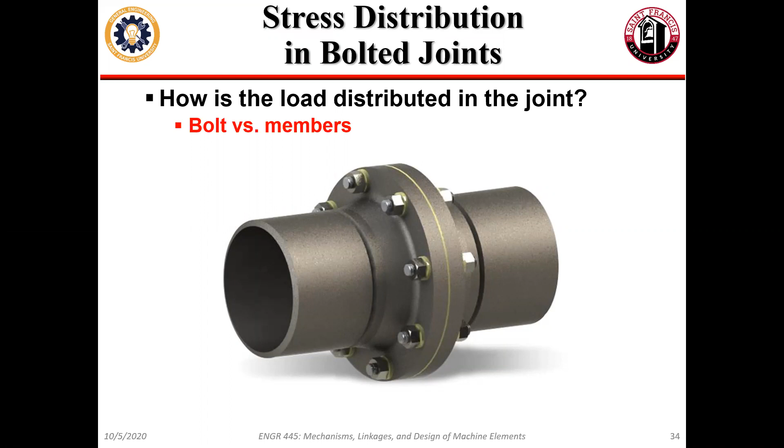So really the question is now, how is the load that we put on a bolt, or that is applied externally, distributed in the joint? We've talked about how the stress is distributed, we've computed how the stiffness is distributed, now we have to talk about how the load is distributed.

Okay, so now that we've come up with a spring rate, kind of a force per unit length of extension or contraction for both the bolt and the members, it's kind of intuitive to say that deformation is directly related to load and stiffness.

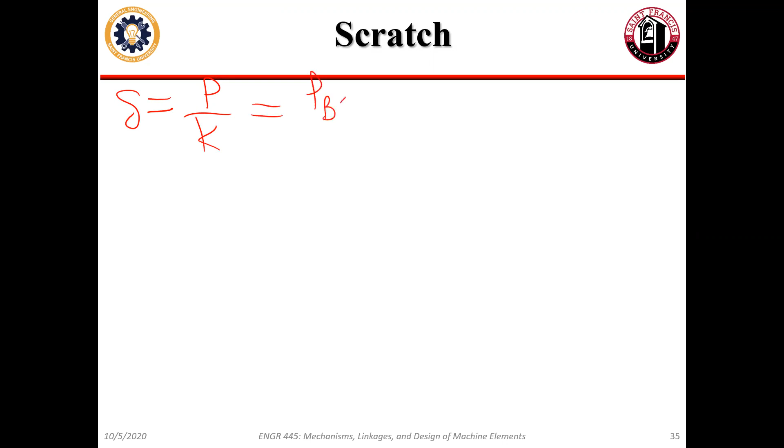That's pretty straightforward. So I can say something like the load that's being exerted on the bolt, divided by the spring constant of the bolt, is equal to however far the bolt's being stretched. And that's the same amount that the members stretch. That kind of makes sense—it's one joint, it's moving as one.

So that also means that whatever load is on the members is related to the spring constant of the members and that same deformation. We're not going to assume they're the same, because they probably aren't. If I have a whole bunch of rubber held together by a steel bolt and the joint's in tension, I'm going to guess that most of the load is going to be taken up by the bolt because it's so stiff.

Intuitively, if I have a platform supported by a whole bunch of really stiff springs and a couple of soft ones, it's the stiff ones that keep it from compressing when I step onto it. It's intuitive that load should distribute itself proportionally to the stiffness of the members holding that load. But we need to, one, prove that, and two, apply it in some way that gives us a numeric result.

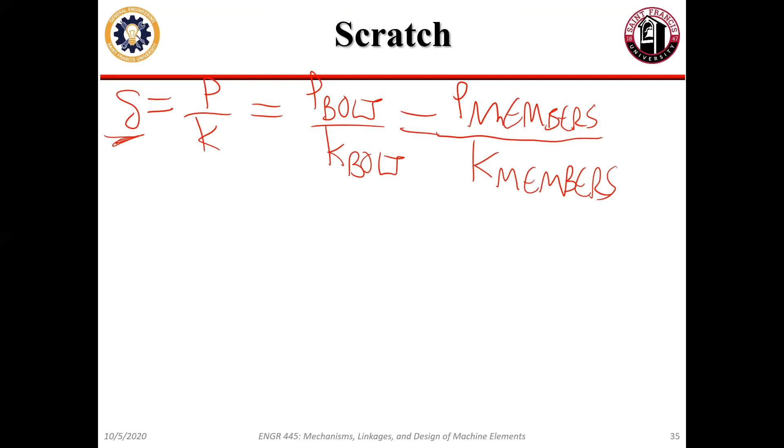So game on. P is just the load, P is a force. P bolt is the load of the bolt, and P members, or that thing that looks like an M, is the force that's acting on the gripped members.

So given that both the bolt and members are experiencing the same deformation, we can solve this out. Say the load on the bolt—I'm just arbitrarily picking that—and that will confirm our intuition that the load on the members or on the bolt is just distributed in proportion to their stiffness.

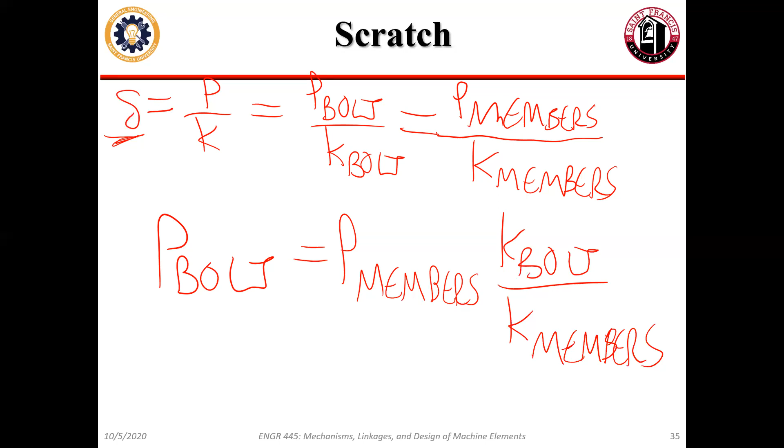If they're both of the same stiffness, great, then they both have the same load. We get that intuitively, and the math is reflecting that, which is great. If one's stiffer than the other—say the bolt's significantly stiffer than you'd expect—the math backs up that it's going to hold more of the load.

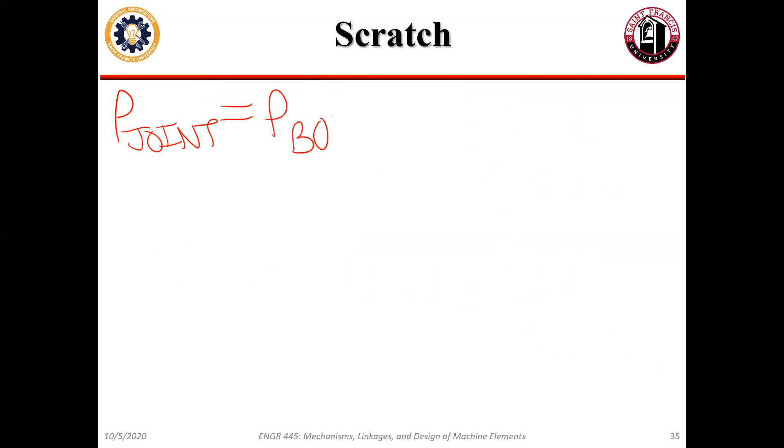So let's play around with this a bit more. We also know from statics that the total force acting on the joint, call that P joint, has to be the summation of the load on the bolt and the load on the members. So that much is obvious, right? If I do a free body diagram, these are all separate members.

Correct—the things that are being clamped. So when you do a free body diagram here, the bolt and the two or more things being clamped by the bolt are separate objects. So when we talk about the load on the bolt and the load on the members, we're not necessarily talking about internal forces. These are each distinct bodies with forces acting on one another.

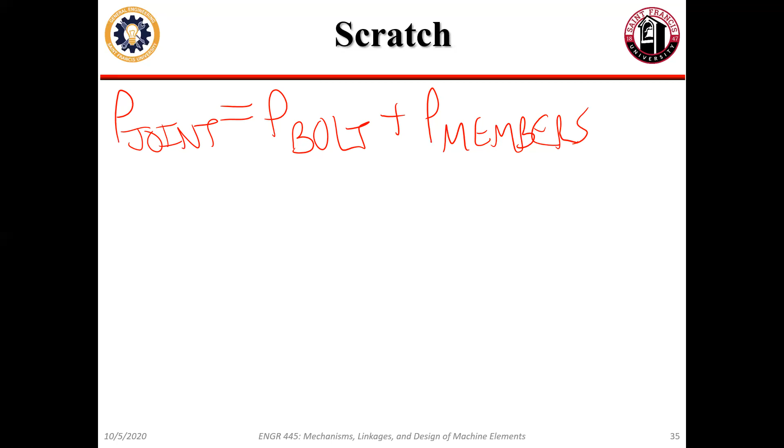So we can do a summation of forces like this and say that the total load on the joint is some summation of all the forces in the joint, which includes both bolt and members together. Using the relationship we just came up with, we can simplify this a bit and put it all in terms of just the bolt load.

I'm going to start shortening stiffness of the members to M and bolt to B, just a heads up. And if we factor out the bolt, that's P bolt times 1 plus K member over K bolt.

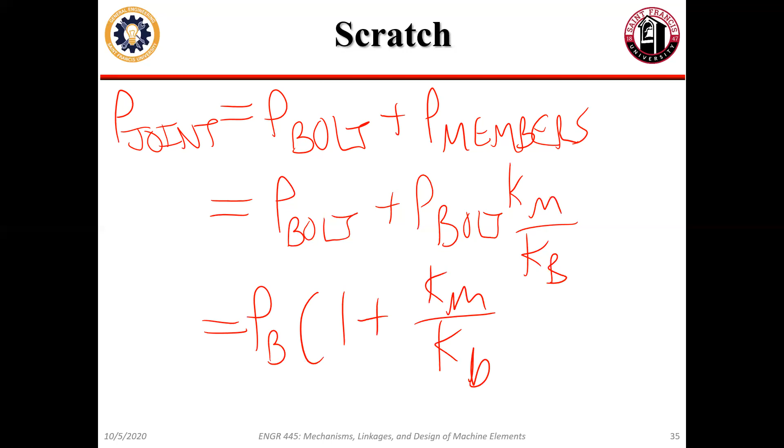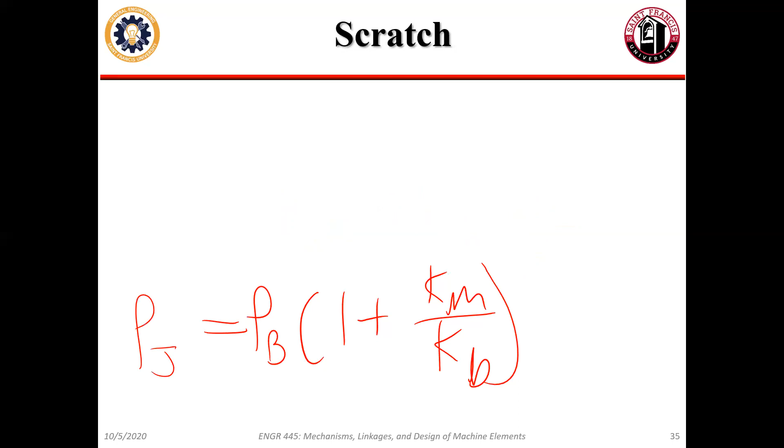Or if you want to flip it around, the load in the bolt... second as it decides which way is up again. Probably. There we go.

So we can flip this around and say that the load in the bolt is just proportional to the load in the joint by the proportion of stiffness, which will be the ratio of stiffnesses between the bolt and the member. So that makes some amount of sense, right? Cool. All right, so this kind of tells us how load is going to be distributed.

What I find really cool about this is that this same intuition holds true across so many different applications. This same idea is how stress distributes in a fiber reinforced composite. That's why we add the glass or the carbon fiber or whatever in there. It's much stiffer than the glue, than the matrix material, so it ends up eating up most of the load. It also makes analysis a pain in the butt, but this same idea holds true. It's super cool, in case you end up doing more stuff with this.

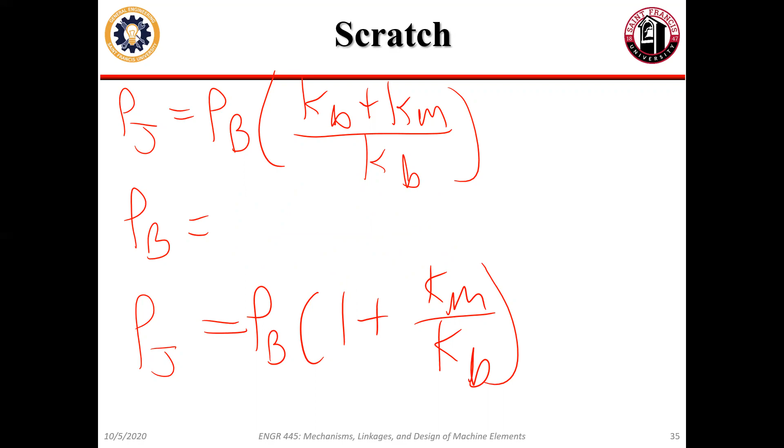So I need to erase it manually by keeping them. Get rid of all that. There we go, all right. So once we got that, I wonder if I can find how to erase it off. The answer is yes, but it's going to take time and it'll be annoying. Cool, all right, so once we got that,

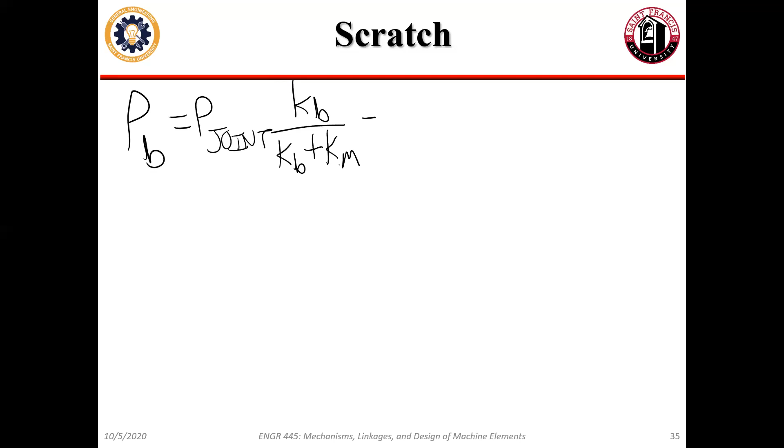That's great, but we've said before that there's one more step to this. The joint will be loaded and we'll distribute support into that, but we're also going to include here preload. So we've talked about this before. This is just a force that I apply to the joint that is over and above whatever load is being placed in the joint by, for example, these are the bolts on the base of a wind turbine, so it's going to be loaded by the fact that there's wind blowing on top of the turbine, the whole tower is trying to fall over and stuff.

In addition to that kind of design load, I'm going to add a preload. So the purpose of adding preload is essentially to make sure that the joint does what I want it to. The joint is only doing this, the load is only distributing itself, because the members in the grip are clamped. If they are not clamped at any point in time, this whole magical thing goes away. Load stops being shared between the bolt and the members, and everything's held by the bolt.

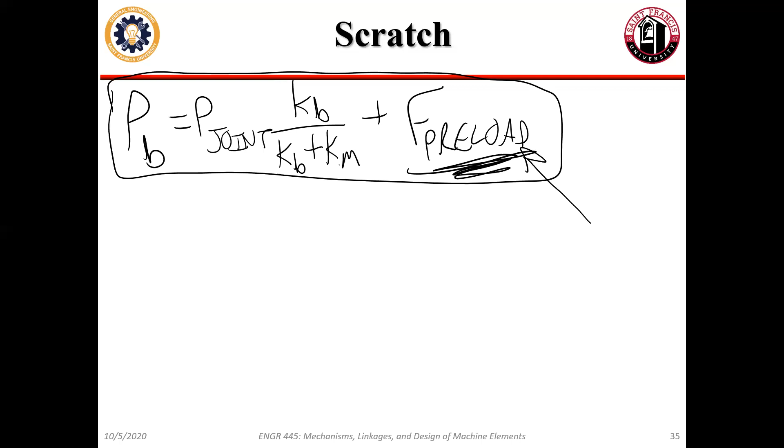So let's talk about that. So if this is our setup, and say that we can come up with an appropriate preload based on a torque wrench or a force indicator, so on and so forth - say that we know what the preload is - that means that the stress in the bolt is pretty straightforward to come up with, right? We grab that, this area being the tensile stress area for the bolt that we talked about before.

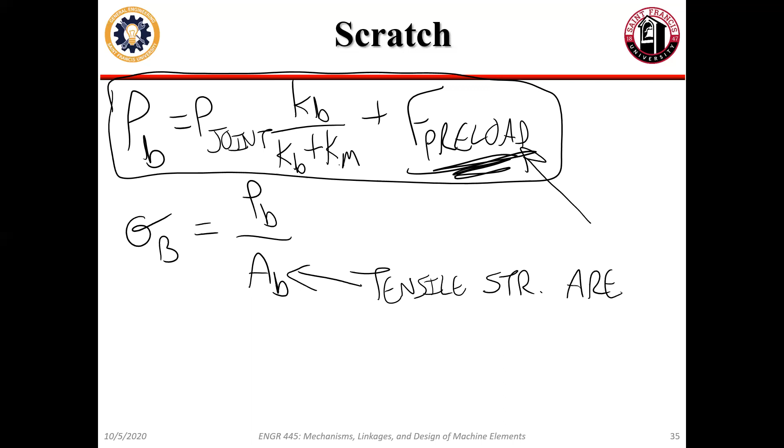That's pretty straightforward. That means we can come up with a factor of safety with respect to the proof strength. Something like that. That's pretty straightforward.

But as said, this factor of safety, that's not really what we're necessarily concerned about. We anticipate that's going to be close to 1 because we want a large preload, because what we're really concerned about is the joint separating. So what we really need to figure out is some factor of safety with respect to joint separation.

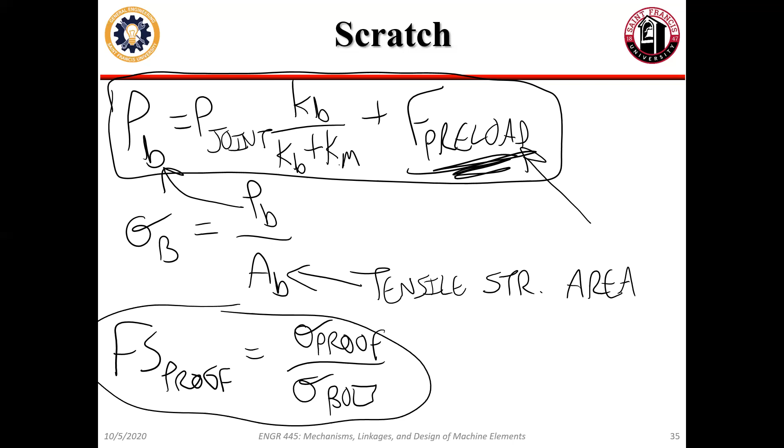So we go back and we expressed... can I erase this, by the way? Cool. So we expressed a statement for the force on the bolt, right?

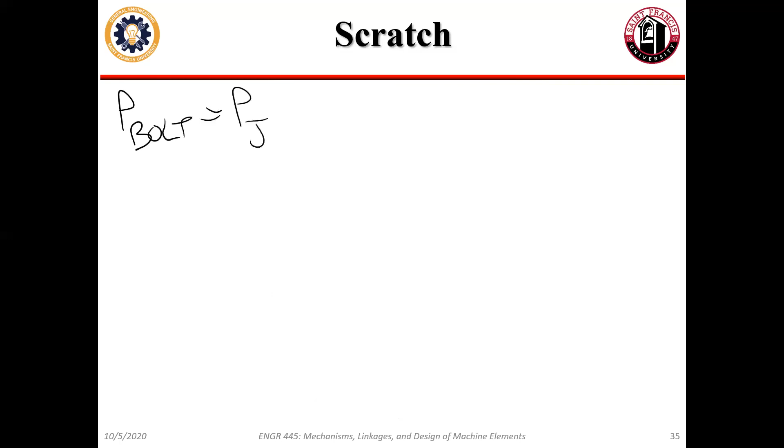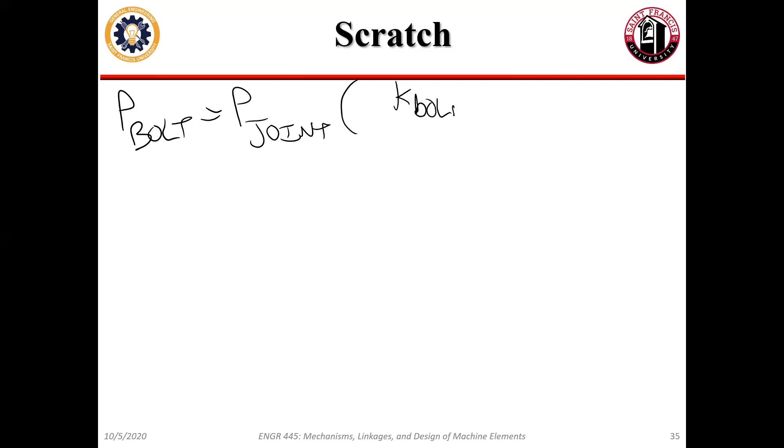We said the force on the bolt is the joint's load times the ratio of stiffnesses. Because the joint load is the summation of the bolt load plus the member load, that means we can just substitute this in and come up with the load in the members being something like this.

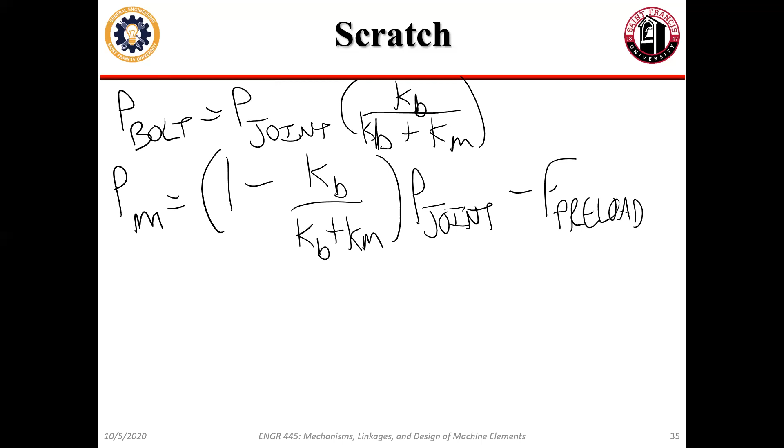When we're saying we're loading it, what direction is that load? Tension. Yeah. Good question. So for the members to separate...

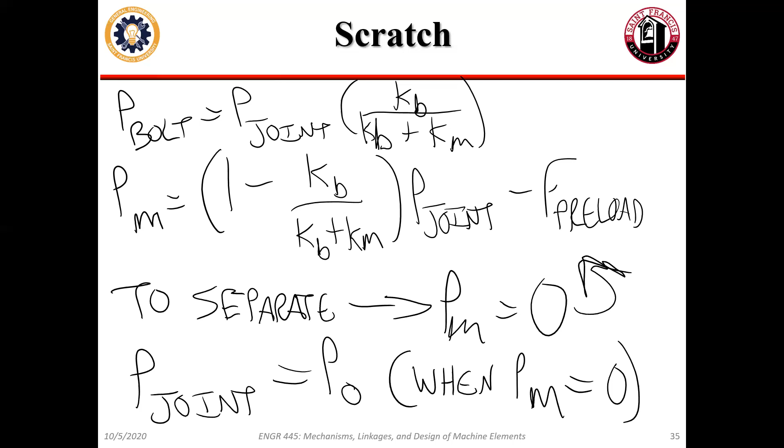The load in the members would be equal to 0. So if we take this expression up here and solve for P joint, we're going to call it P naught, for this condition when the load in the members is 0. If we go ahead and solve for that, we could use that to come up with an expression for a factor of safety with respect to joint separation. So we'll call that something like...

P naught over the applied load. Or if you want to use the notation we have been using, P naught over P joint.

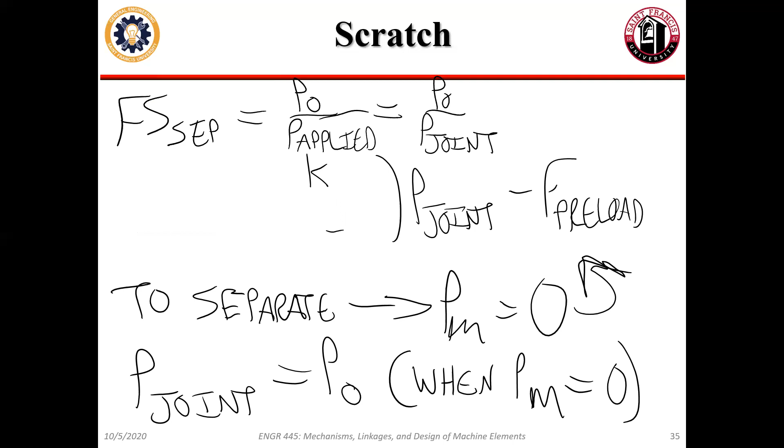So if we work all that out, it is P joint when the load in the members is 0. So if you take the equation I just erased, set it equal to 0, solve for P joint, that is P naught. Cool beans? Sweet. All right. So if you solve that out, you get something like this.

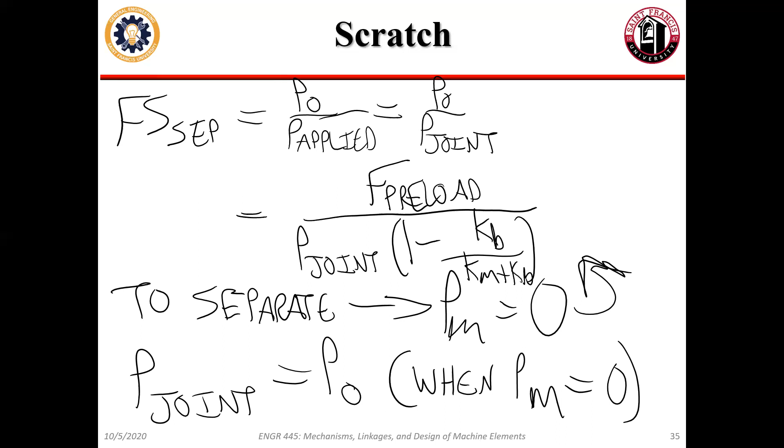Some of this extraneous stuff, which directly has... I'll make this a little bit more clear here too. So the factor of safety in separation is directly proportional to the amount of preload that you throw on this.

So sure, you don't want to yield the bolt because you're putting preload on. Actually, depending on your application, you might want to. Some people actually load a bolt plastically with their preload because it keeps the joint clamped for longer. It depends on the strength of your bolt and what it's made out of and all that. When I want to do that, usually preload is just your proof strength, but it makes sure your members stay clamped and your load sharing stays on. So there we go.

Any questions with that? This is kind of the end of bolts for us. I was hoping we'd get to fatigue in bolts, but it looks like we have to keep going. So we can talk about gears and brakes and springs.

It seems almost counterintuitive to me because you're clamping the bolts down until they're almost yielded. Yeah. And then you're putting more tension on the joint. Yeah. But the bolts don't... Right. It is right. It is right. It is weird. Absolutely. That's what I thought first. But I'm going to say this.

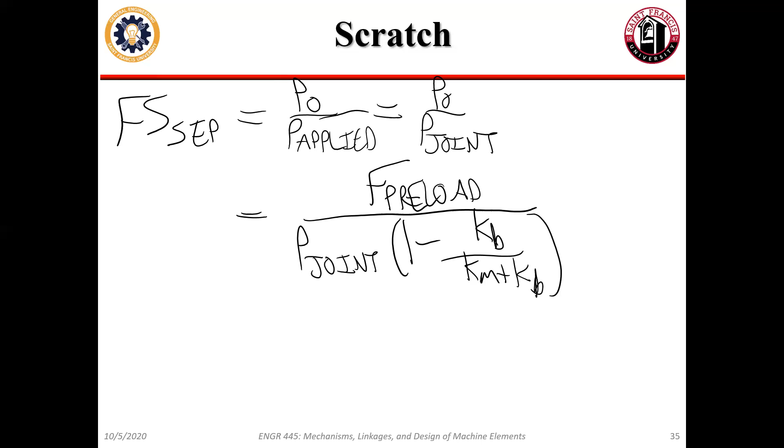Cool beans. Any other questions? Cool. All right, so that's all we got for bolted members. Time for the fun — meaning final project.

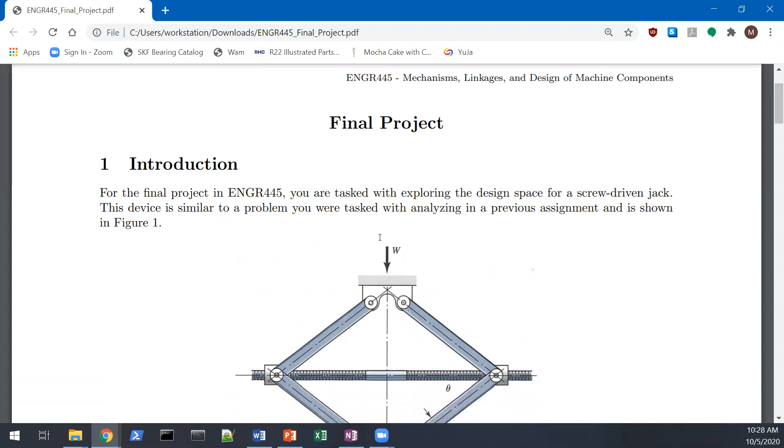Alright, so this is also in Canvas right now. Final project is to design this.

Screw jack, but here's the fun part. We've talked a lot about design of different components and so on and so forth. Your task isn't just to design a screw jack, your task is to explore the design space for a basic screw jack. So here's the design handed down to you by the powers that be, quote unquote.

It's the same one you had for homework before. You have a pair of links on each one of these arms of a specified width, and so on. You have the lead screw in the center, and you have some load pressing down at the top.

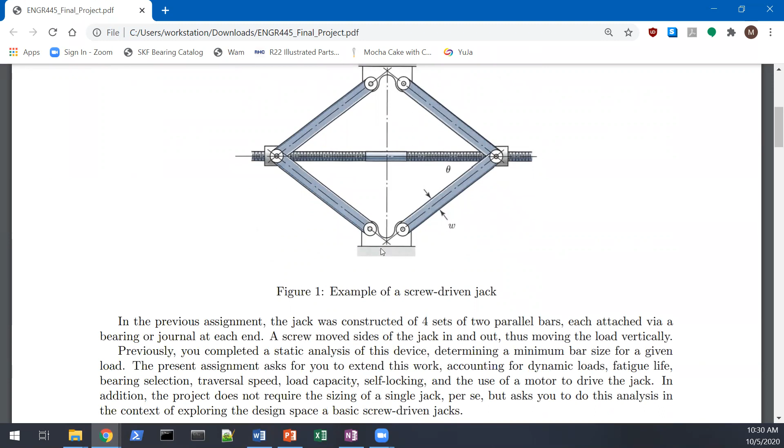The thing that's of interest is, okay, if you have to make this for a Toyota Echo, a small car in the US, this could be one size. If you have to make it for a Dodge Ram 3500, this would be another size, going from a curb weight of like 2,000 pounds to a curb weight of 7,000 pounds. Not to mention the Toyota Echo has a ground clearance of about 4 inches, and a Dodge Ram has a ground clearance of like a foot.

Those two jacks will look very, very different. The question is, how will this design change as we go between those two extremes? Or if you want to think of the design space as having corners to it...

On your horizontal axis you have weight, vertical axis you have maximum height that you need the jack to get to. We're going to look at many combinations of weight and vertical reach and ask the question of what does that do to the performance of our jack?

And that is your project. When you talk about performance, you're talking about how quickly the jack will traverse under its maximum design load. So if you're designing it for a 3,000 pound max safe working load and a vertical traverse of like 18 inches, say, how fast will it traverse that?

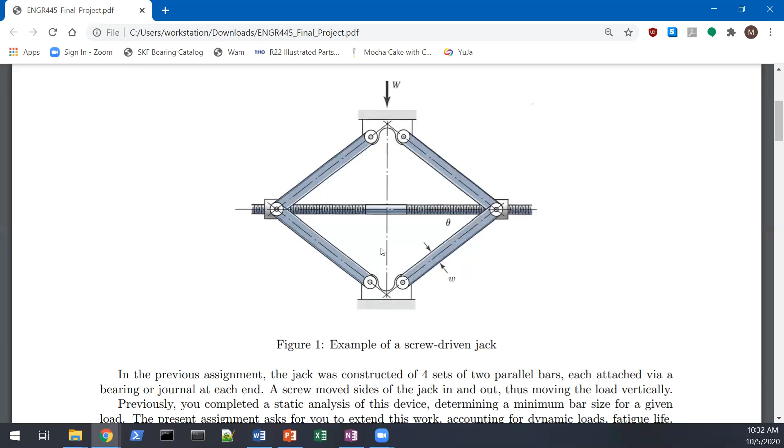And your jack design should span all combinations of vehicle weights and vertical reaches specified here. Specifically, looking at loads from 2,000 pounds to 7,000 pounds, and maximum vertical reaches - the maximum height the jack can achieve physically - going from 10 inches to 22 inches.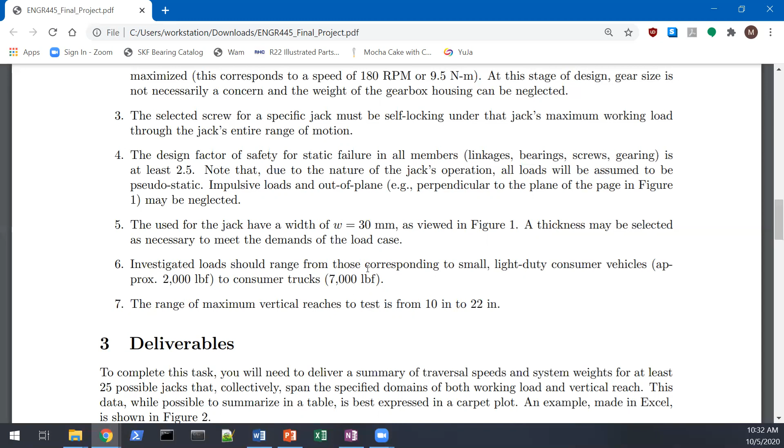A couple other things of note: this is going to be an electrically driven jack. It will use a single 180 watt motor, weighing 2 pounds. It is most efficient at a speed of 180 RPM, or when it has a torque of about 9.5 Newton meters.

You'll need to come up with some sort of gearbox in order to keep the motor running at that speed and transform that into whatever torque you need in order to run the bolt.

When you say designing gearbox, do you want 2 gears? Spur gears, okay. Unless you want something harder - you want 2 gears to achieve the gear ratio we want, unless you want to add more. Idea is make it as compact as you can, as simple as you can.

So yes, it means planetary gearboxes are out, unless you really want to do that as a design. Because I think they do use planetaries for a lot of those small high reduction applications. For this one, the problem with planetary gearboxes in this particular application is that they're an inline gearbox, so it changes the orientation of your thing.

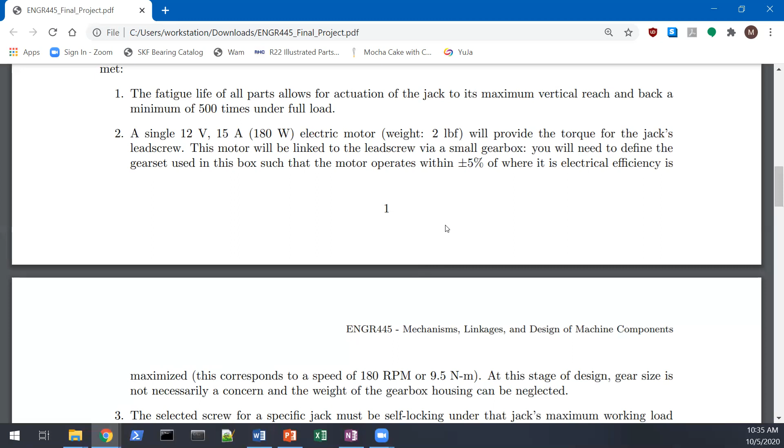Some other things to note: fatigue life of all parts must allow for the jack to reach its maximum vertical extent and come back at least 500 times. If it has an infinite fatigue life, great, but it has to do it at least 500 times.

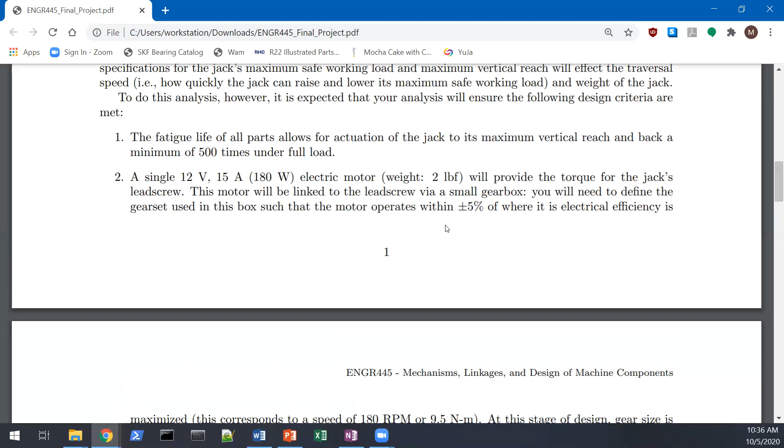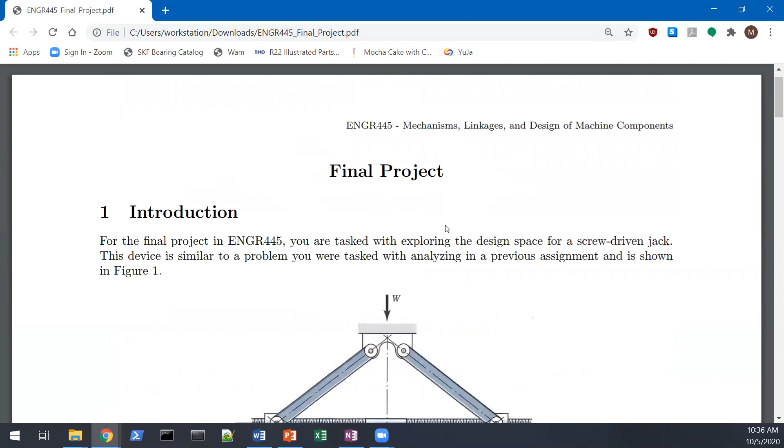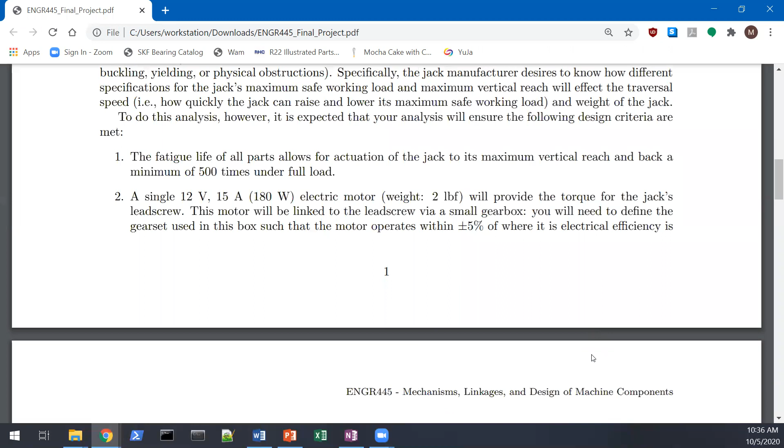So you have to be checking parts for fatigue life. Also, whatever screw you select for this screw-driven jack must be self-locking under the computed load. It does give you some flexibility to change the screw depending on what you decide is appropriate for a given load.

Similarly, you should also be checking the design factor of safety for every jack you come up with, such that for all members—bearings, linkages, screw, gearing, everything—the factor of safety for static failures is at least 2.5.

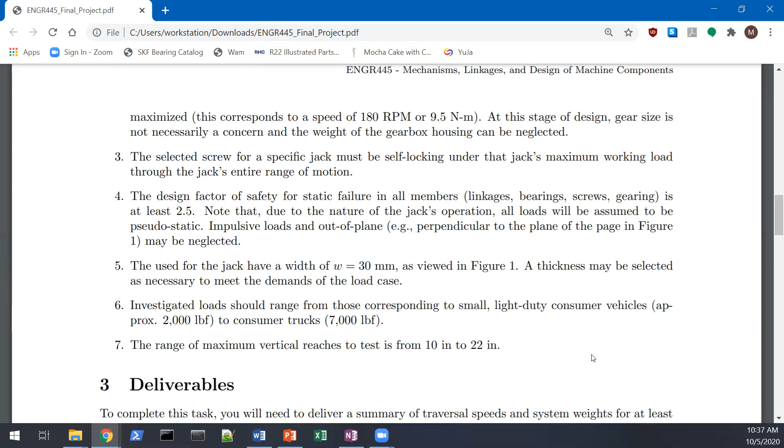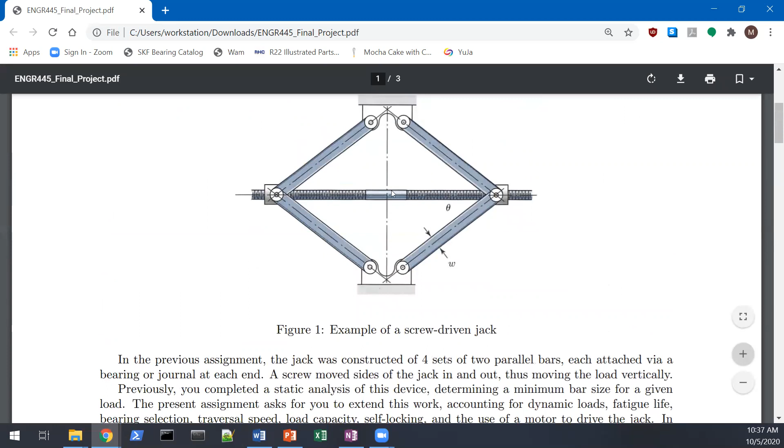We're going to assume that due to how jacks are operated, all loads are pseudostatic, meaning you can neglect impulsive loads. Also, we assume lateral loads, or loads out of plane, going into or out of the page, are negligible as well. So just consider loads coming from the static weight of the vehicle. You'll have to assume something concerning how that load is distributed to the jack based on your use case.

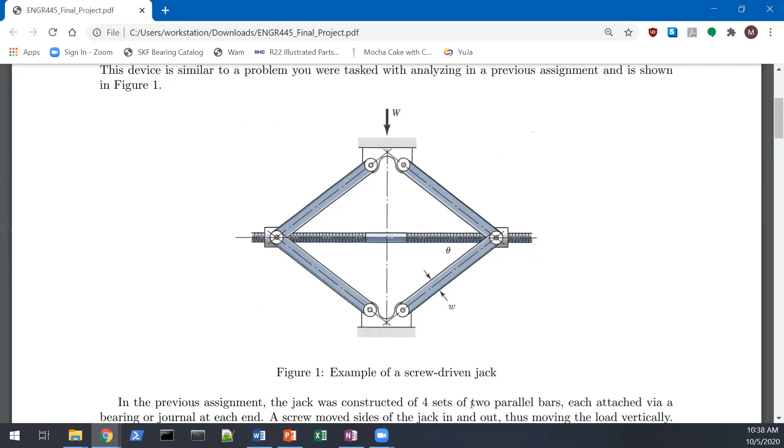Should we consider the bars as two bars or one thick bar, or is that up to us? It is specified that it is 4 sets of 2 parallel bars each, with the width of each bar being 30 millimeters. I had to throw something metric in.

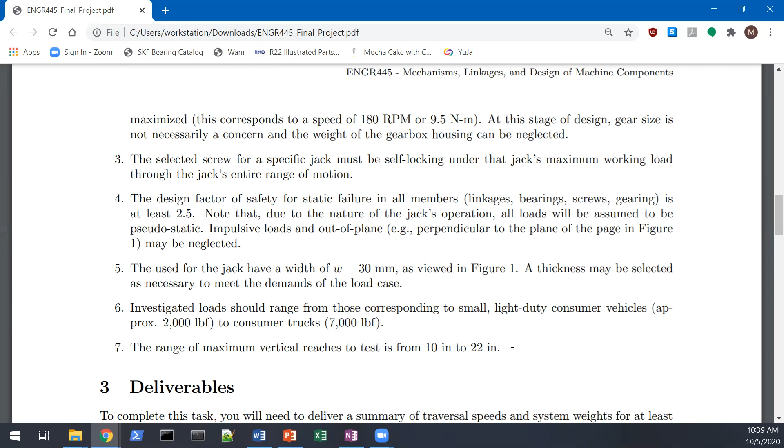When I say all combinations, I mean at least 25. Try to distribute them evenly, please. You can do more if you feel like it, but at least 25.

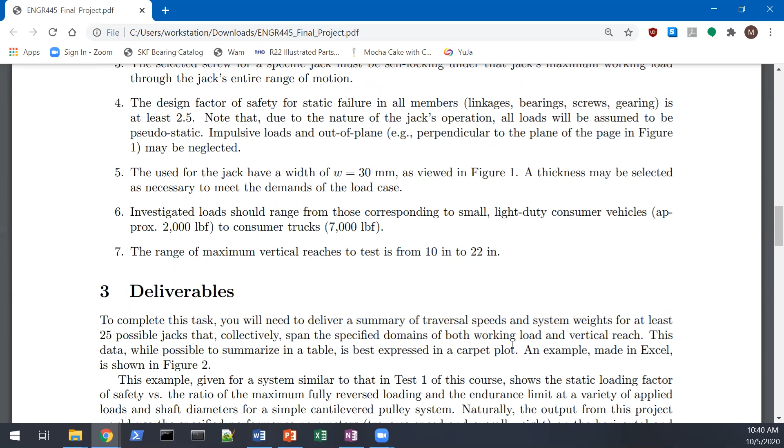Now, what I'm looking for in terms of how this data looks—sure, you could tabulate it all in a table and be done with it, and that's great, tabulated data is fantastic. But the manufacturer wants to get an idea of what this design space looks like and what trends there are. So I want a carpet plot.

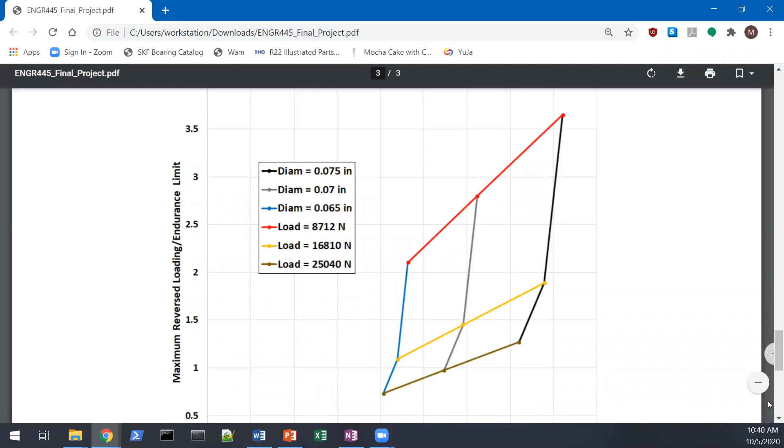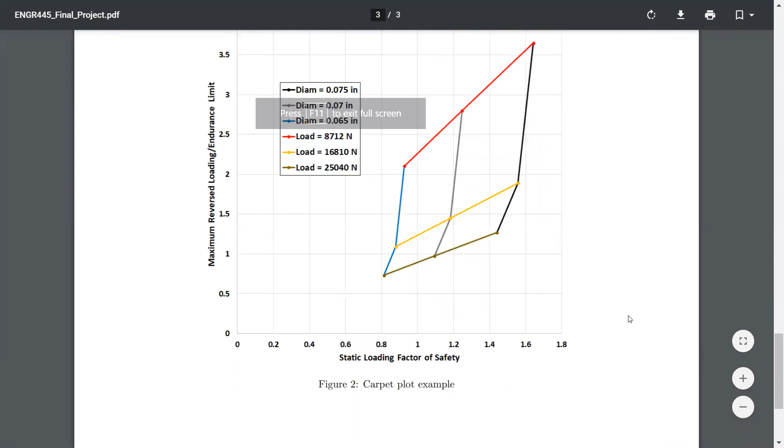A carpet plot, if you don't know what it is, looks something like this. This is a carpet plot I made of the pulley system from your first test, based on varying the diameter of the shaft and the load applied to the pulley.

It's plotted on a grid of static loading factor of safety here, and then ratio of the maximum reverse loading over the endurance limit on the y-axis. What I've done is come up with 9 different points corresponding to different loads and shaft diameters.

So if I'm on the yellow line, that's a line of constant load, and then I go from one diameter to another—that's 0.07 inches, the black line is 0.075 inches—and I can see trends here.

For example, I can see that factor of safety and my endurance limit ratio varies more or less linearly with load if I go along the line of constant load. But if I go along the line of constant diameter, it varies exponentially.

That's the kind of stuff you can see on a carpet plot. And as someone who's going to be looking at your design to evaluate what jack I should make, that's what I want to be able to see.

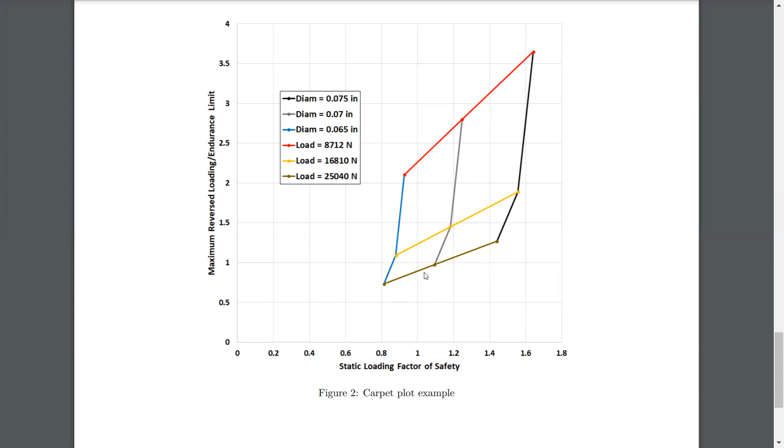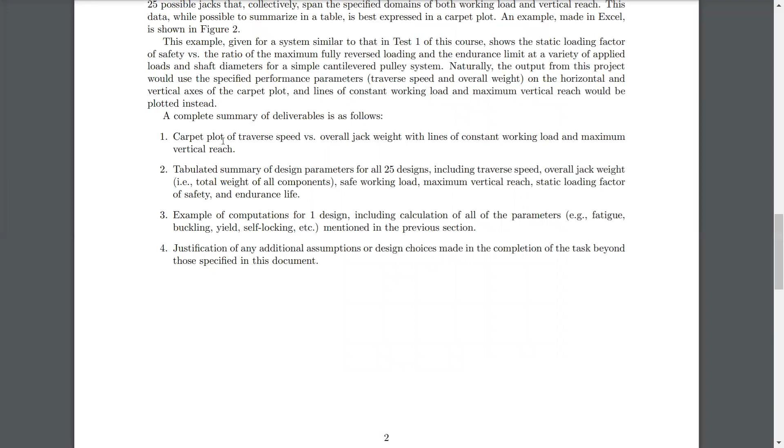So I specify up here that I want to make a carpet plot with, instead of a factor of safety and my endurance limit ratio on the X and Y axes, since I've already set specifications for both those for every jack design. You can think of every point on this plot as being a separate jack design, or for the exact scenario I've done here, it's a different shaft design.

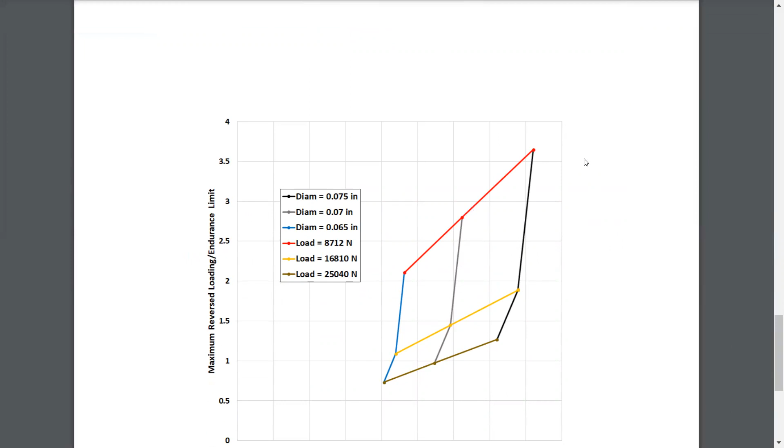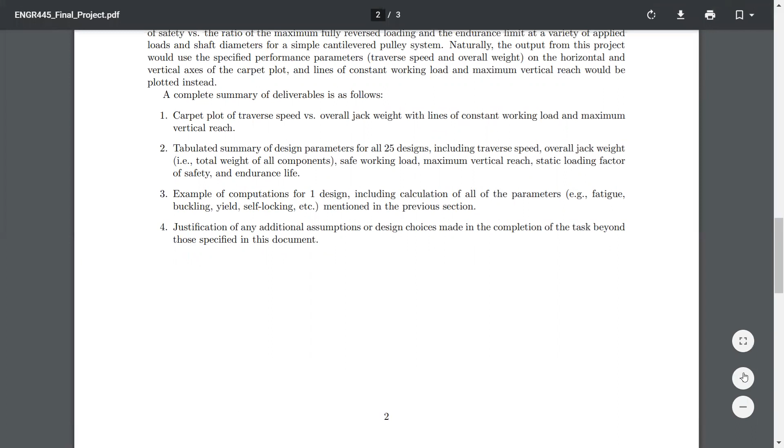Instead of factor of safety and this endurance limit ratio on the X and Y axis, I like traverse speed and overall jack weight on the X and Y axes, kind of my performance parameters. And then instead of lines of constant shaft diameter and constant pulley load, I want lines of constant working load. So that's whatever vehicle weight you're designing this for, and lines of constant vertical reach, so how high the jack can go, which may be limited by buckling, yielding, or just physical stuff getting in the way. You'll have to figure that out.

All right, so that's deliverable 1. I want a carpet plot with all your designs on it. Two, I do want a tabulated design summary. Seeing trends is one thing, knowing a little bit more about the designs is another. So this would be for all 25 designs, and it would include traverse speed, jack weight, safe working load, maximum vertical reach, static factor of safety, and its endurance life.

I would say the endurance life would be really nice to know, how many times the jack can be actuated. So the units of endurance life are 500 lifts or 1,000 lifts, something like that. If it's infinite, great. The specification was it just has to be more than 500 times up and down.

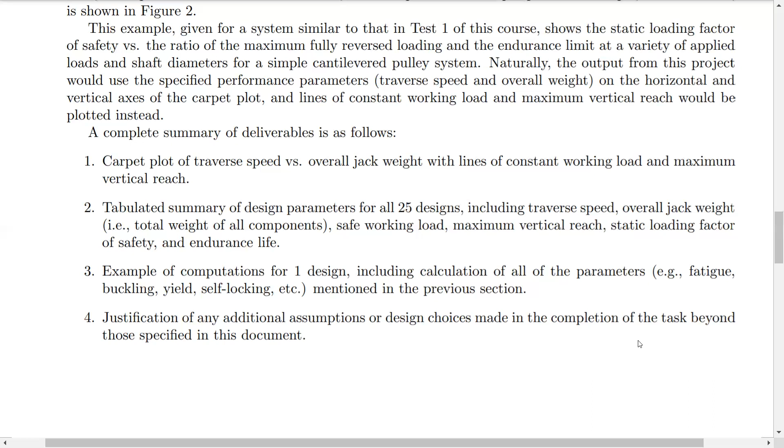Cool. All right, so that's your project. It is due at the time of your final exam. Your next question is, what the heck, why do we still have a final exam? Answer is this project does not cover everything that we'll cover in the class, because it seems dumb to make a project you can't do until the week before finals. So this does not necessarily cover everything that we'll be doing in class. As a result, your final exam will be more like a small test that will just cover the last few weeks of class.

Any other questions? Yes. Does this look right? It doesn't look right to me.

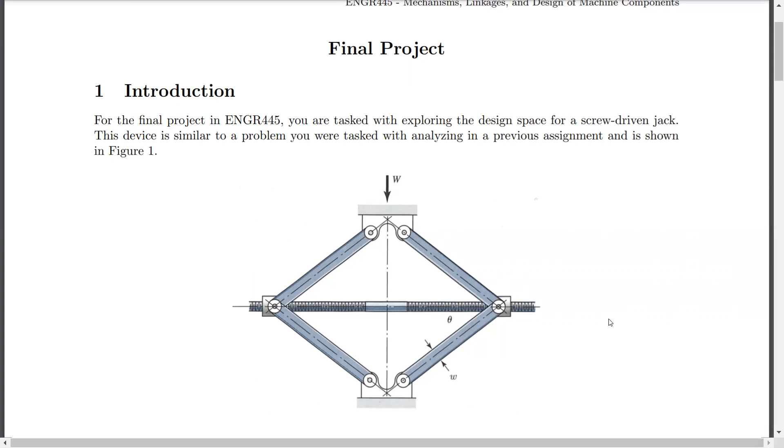A carpet plot does not have to look like this in order to be correct per se. What you have is a valid data set and you're plotting parameters against it. A carpet plot is supposed to show trends. When those trends fall apart, the carpet plot says, well bud, your trends are falling apart. All right, so there's nothing else.